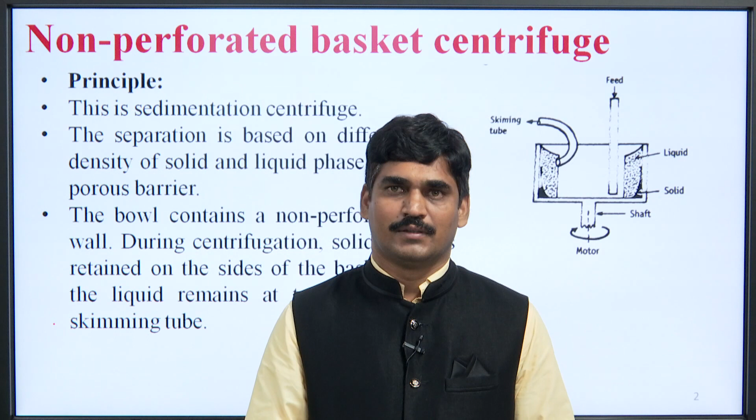The first equipment we are going to discuss in this lecture is the non-perforated basket centrifuge. In previous lectures, we have already discussed the perforated basket centrifuge.

The principle of working of this non-perforated basket centrifuge is that it is a sedimentation centrifuge. The separation is based on difference in density of solid and liquid phase. Heavier particles separate to one side and lighter particles get separated and deposited on the other side without a porous barrier.

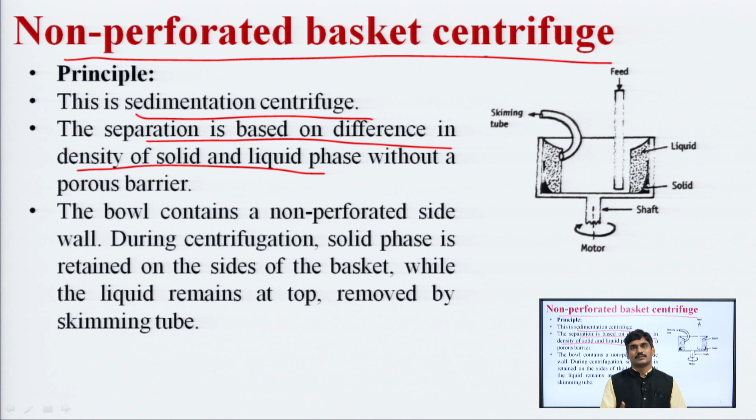As you see in the diagram, these are the two different portions where both the particles are separated out. This is the direction of rotation of this apparatus, which is attached to a motor and shaft. From the top of the apparatus, feed is introduced into it.

The bowl which is used for the separation process contains a non-perforated side wall. As in the previous case, we were using perforated side walls, and beneath those perforated side walls, filter cloth or screen was used. Here, no perforation is there on the side walls.

So what happens during centrifugation: solid phase is retained on the sides of the basket, while liquid remains at the top, and this liquid can be removed with the use of this skimming tube.

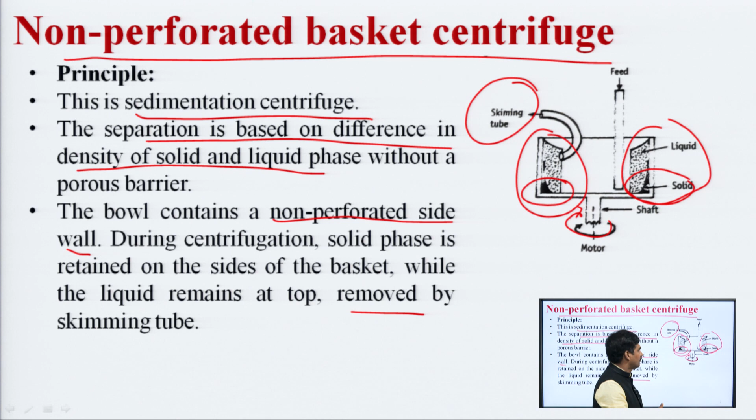With the help of this skimming tube, liquid which is present on the top is removed. The solid particles are at the bottom of the basket and the liquid particles are on the top of the basket. From the top, these liquids are collected with the help of the skimming tube.

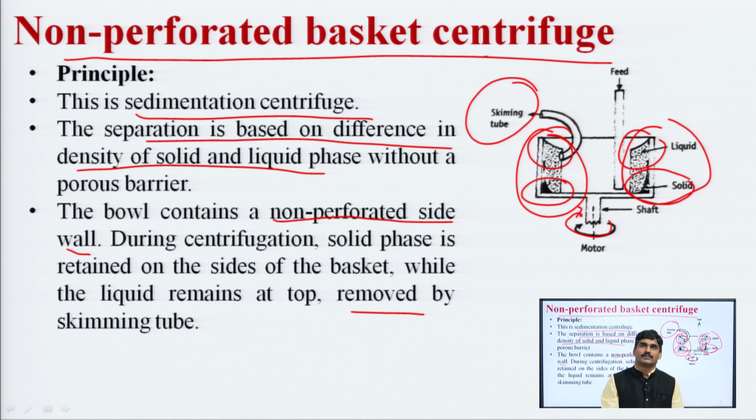Construction of this basket centrifuge: the basket which is used is made up of steel. Second, it is suspended on a vertical shaft. Below this shaft, one motor is attached, and with the help of this motor, the shaft moves.

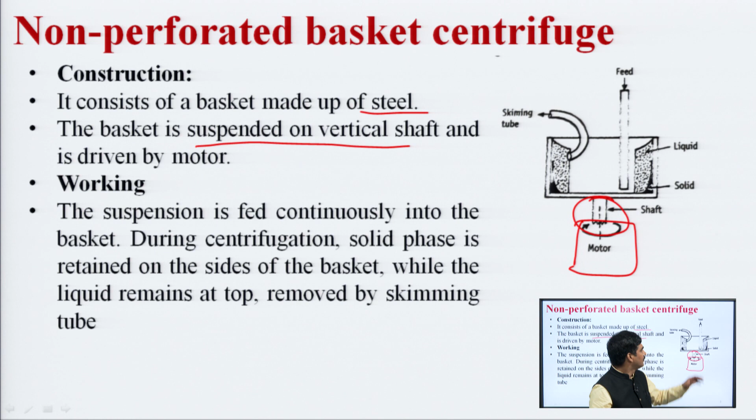Now, working of this non-perforated basket centrifuge: the suspension is fed from the top. This is the point for entry of suspension or slurry into this non-perforated basket centrifuge. From this top position, the suspension or slurry can be introduced into the centrifuge continuously, so we can say this centrifuge can be used as a continuous type centrifuge.

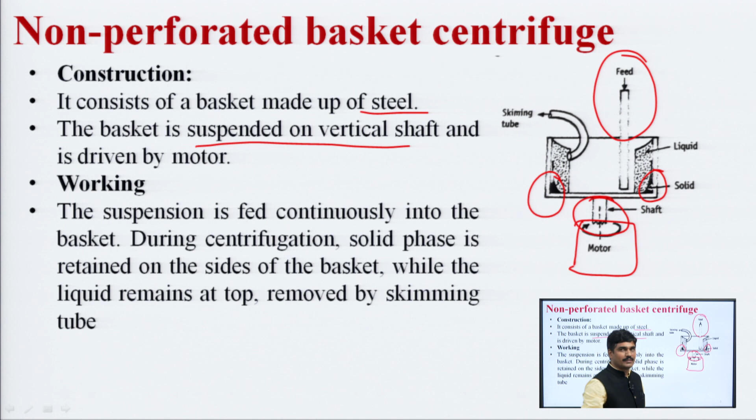During centrifugation, the solid particles are retained on the sides of the basket. Here you see the dark particles, which represent the solid particles. This solid phase remains retained on the sides and bottom of the basket, while the liquid present in the suspension remains on the top portion of the centrifuge.

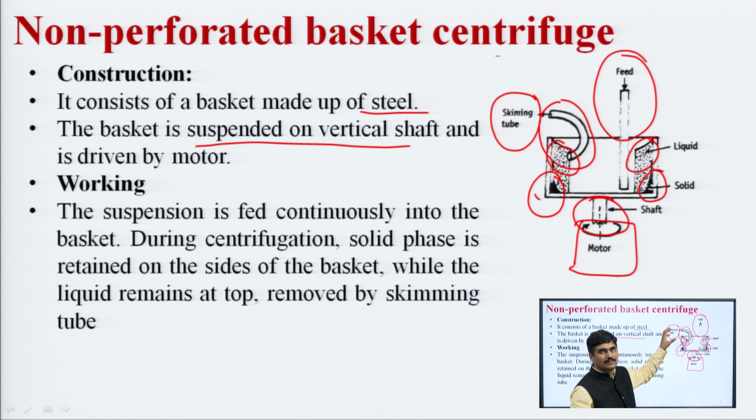As the amount of liquid gets collected on the top of the centrifuge, it is taken out through this special tube, called the skimming tube. With the help of this tube, the liquid which is separated out can be collected on the other side or removed from the centrifuge.

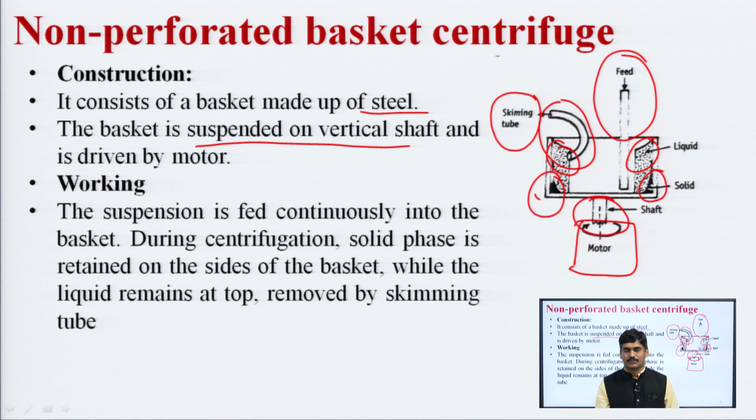Working of this non-perforated basket centrifuge: when the suspension or slurry is introduced into the non-perforated basket centrifuge, it is rotated with the help of the motor and shaft. After rotation, separation of particles takes place.

Solids are separated since solid is denser than liquid particles, so it gets separated on the bottom and side walls of the container, while the liquid is on the top of the centrifuge, and from the top the liquid is collected out with the help of skimming tubes.

So in this way this centrifuge works. As the solids which are collected after centrifugation get deposited on the walls of the basket, if the depth of solid is increased on the walls of the centrifuge, the centrifugation process or operation is stopped, and the solids are scraped out by hand or with the help of a blade. The solids which are deposited can be collected, or the cake can be removed.

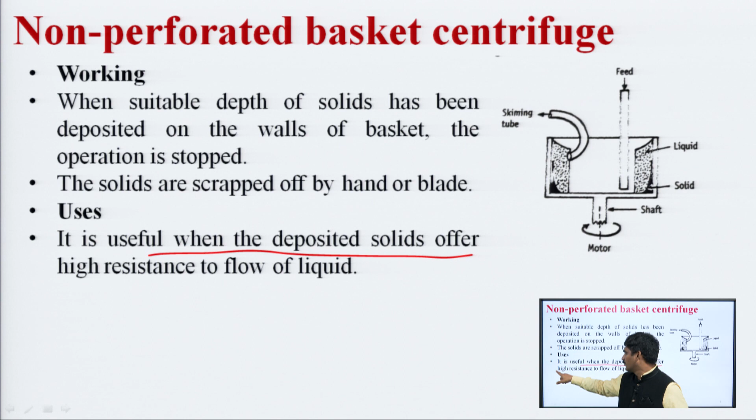Uses of this non-perforated basket centrifuge: mainly it is useful when the deposited solids offer high resistance to the flow of liquid. In such cases, this type of centrifuge, the non-perforated basket centrifuge, can be used for separation of solids from the slurry, and both the solids and liquids can be separated out.

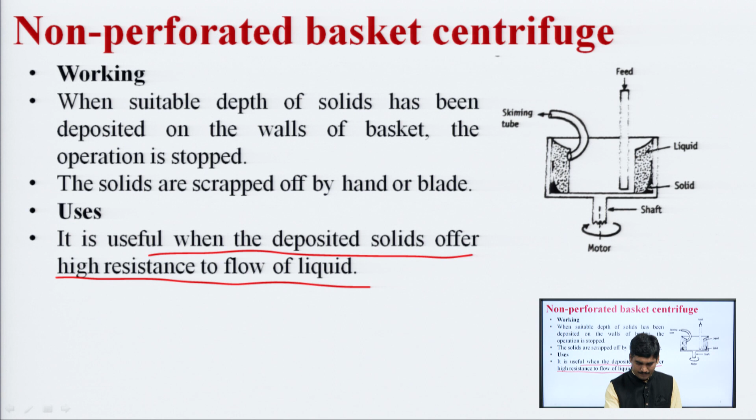So, it consists of a rotating basket placed on a horizontal shaft. In previous cases, we have used a vertical shaft. In this case, we are using a horizontal shaft. So, the rotating basket is placed on a horizontal shaft, and again the sides of the basket are perforated as has been explained earlier. So, there is a perforation on the sides of the basket.

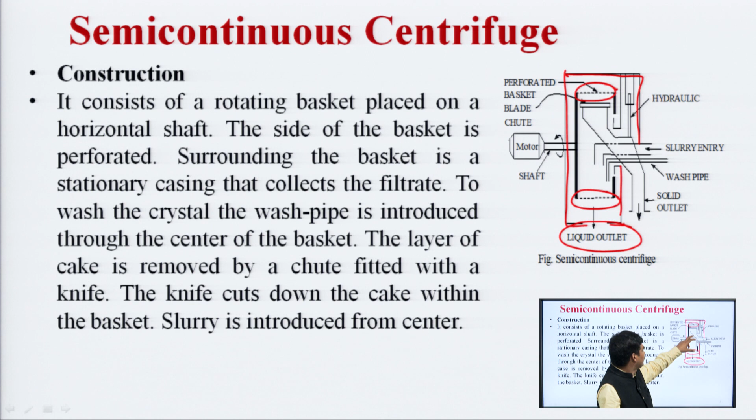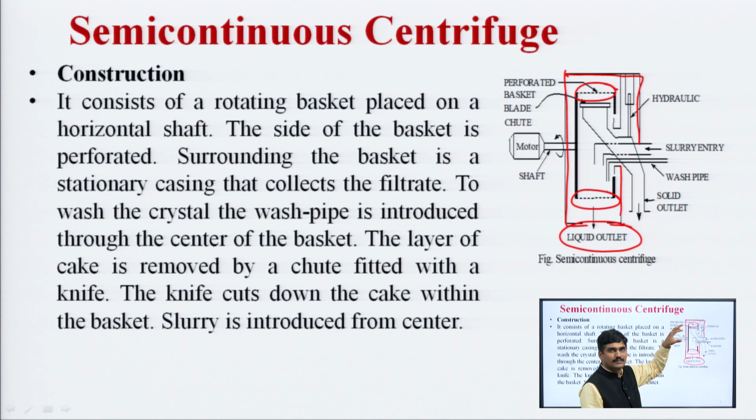To wash the crystal, the wash pipe is introduced into this assembly. The layer of cake is removed. The cake which is deposited on the walls of this perforated screen can be removed with the help of a blade. This blade is called a chute. With the help of this blade, the cake can be removed.

So, the layer of cake is removed by this chute fitted with a knife. The knife cuts down the cake within the basket, and it is removed, and again the slurry is introduced from the center. At this point, slurry is introduced into this pipe, cake is cut from this portion, and through this outlet the solids or cakes are collected. So, this is the simple construction of this semi-continuous centrifuge.

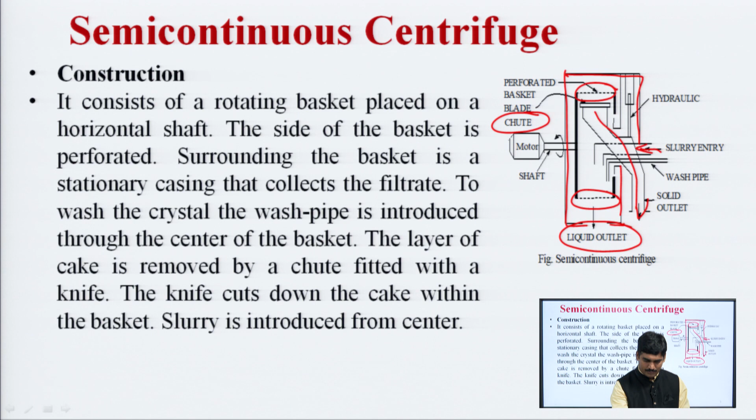If you see the diagram, as already explained, perforated sides are there on the container. This is the motor, this is the horizontal shaft. With the help of this shaft, this assembly rotates. This outer layer is a stationary casing in which the filtrate is collected, and from this liquid outlet the filtrate can be collected into the receiver.

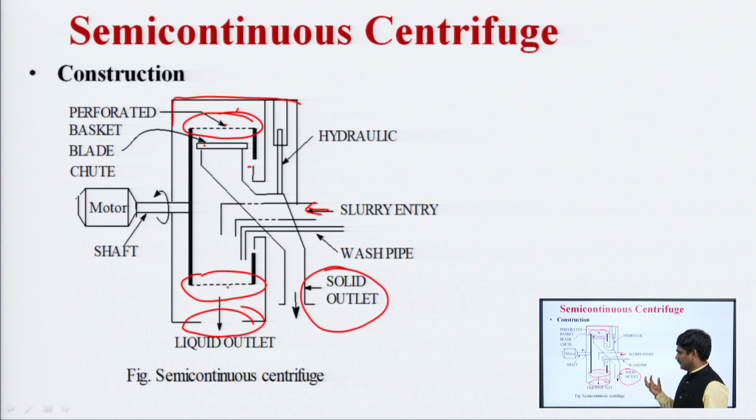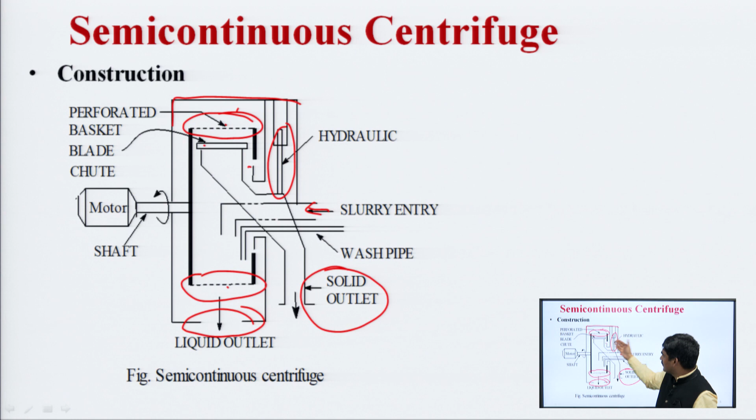There is a point for slurry inlet. Through this, slurry is introduced into this chamber. Here the knife is fitted; this assembly is called the chute. From this assembly, through the solids outlet, solids can be collected. This is a point for hydraulic; with the help of this hydraulic, this assembly can be introduced. This is called the wash assembly. After washing or removal of cake, this is taken out, slurry is introduced into this chamber, centrifugal effect is provided and separation takes place.

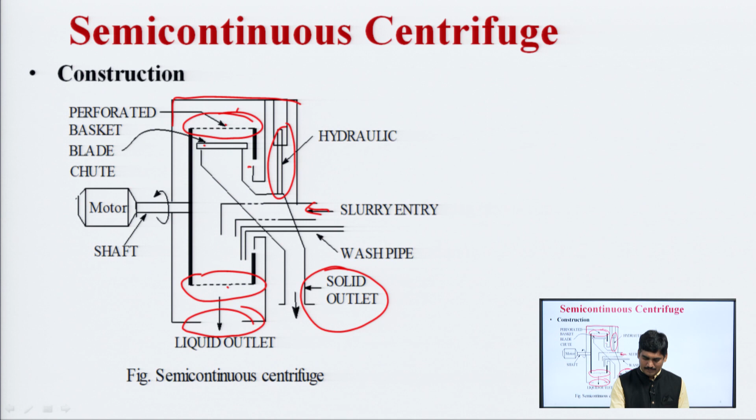Working of this semi-continuous centrifuge. What happens? The basket is rotated horizontally by the motor. The motor, attached with a horizontal shaft to this unit, rotates the basket, and the basket has perforations on the side walls. The slurry enters through this slurry inlet into the basket, and the basket is rotated at a high speed, or the centrifugal effect is applied.

Due to the centrifugal effect, the liquid present in this slurry passes out through the perforations into this stationary unit. From the perforated side the liquid comes out, and the crystals present in this slurry remain on the sides of the perforations.

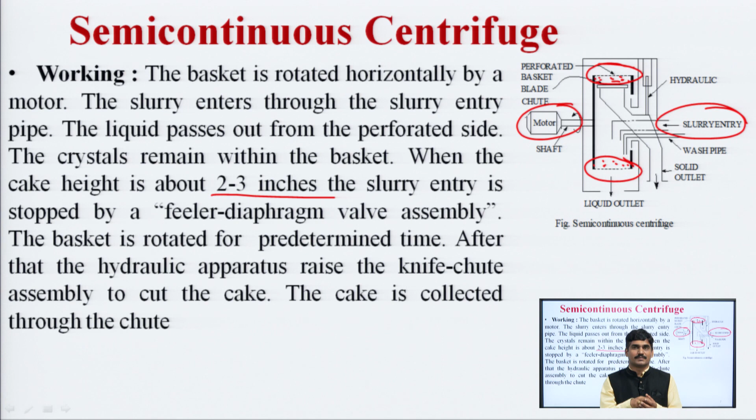As soon as the height of cake reaches 2 to 3 inches, the entry of slurry is stopped by a feeler diaphragm valve assembly. Why is this stopped? The height of the cake remaining within the basket increases, and the limit for that height is 2 to 3 inches. As soon as it reaches this height, the entry of slurry is stopped, and the basket is rotated for a predetermined time.

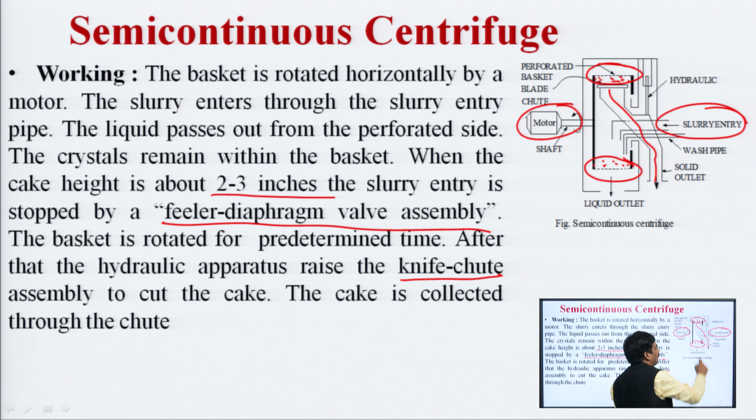After that, hydraulic pressure is applied. Due to this, the blade chute assembly, or knife chute assembly, comes into the basket and scrapes out the cake deposited on the perforated side of the basket, and the cake is collected into this chute assembly and taken out from the solid outlet. In this way the semi-continuous centrifuge works.

So, why is it called a semi-continuous centrifuge? We are entering the slurry into the assembly, and the basket is rotated with a certain speed till the height of cake reaches 2 to 3 inches. As soon as it does, the slurry entry is stopped, and further the apparatus is rotated for a certain period of time.

Then the chute assembly is introduced. With the help of that assembly, filter cake is collected or solid particles are removed, and again the slurry is introduced. So, during this second introduction of slurry, at first we are introducing the slurry, checking the height, stopping the entry of slurry, clearing the solid particles, then again we are entering the slurry into the apparatus.

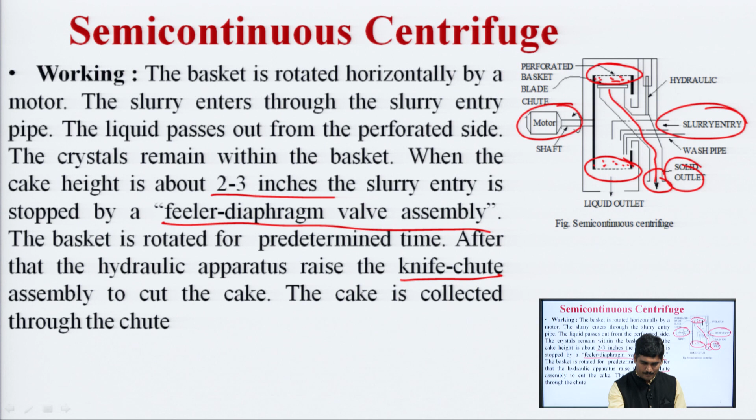That is why there is a gap between the first slurry entry and the second slurry entry. So, due to this reason it is called a semi continuous centrifuge. It means we are not entering the slurry continuously into the equipment for a certain period of time. Now, uses of this semi continuous centrifuge.

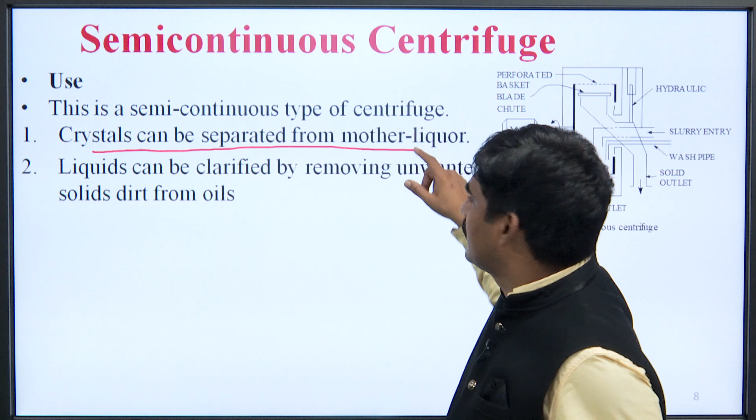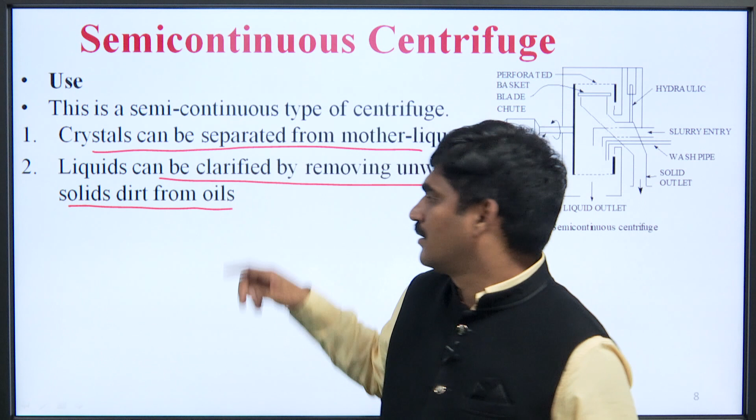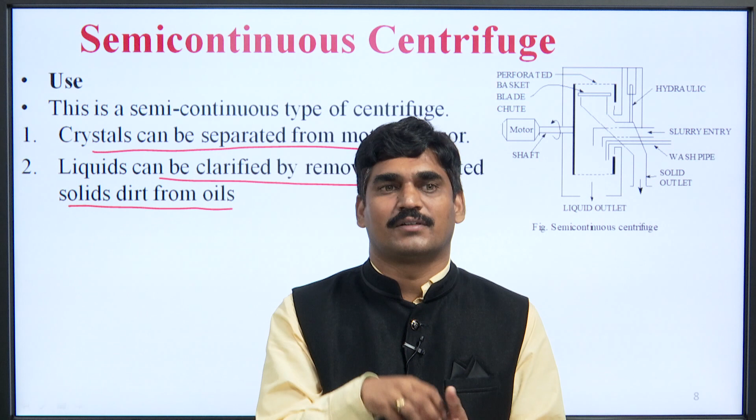In this case, crystals can be separated from the mother liquor. That means this centrifuge is used for separation of crystals from mother liquor. Second application, liquids can be clarified by removing unwanted solids, solid dirt, from oils. That means, for separation of dirt particles or solid particles or unwanted particles from oils, this semi continuous centrifuge can be used.

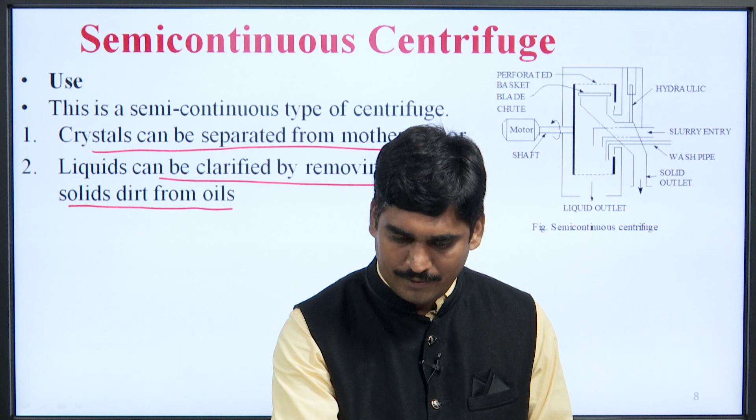Next centrifuge is the super centrifuge. The construction of this super centrifuge is somewhat simpler as compared to other centrifuges. This super centrifuge is an example of a continuous centrifuge. These are used for separating two immiscible liquids. What is the first thing? It is a continuous centrifuge. Second one, it is used for separating two immiscible liquids.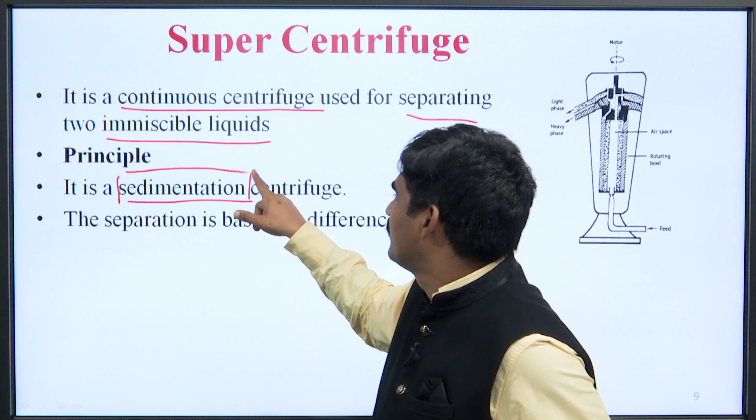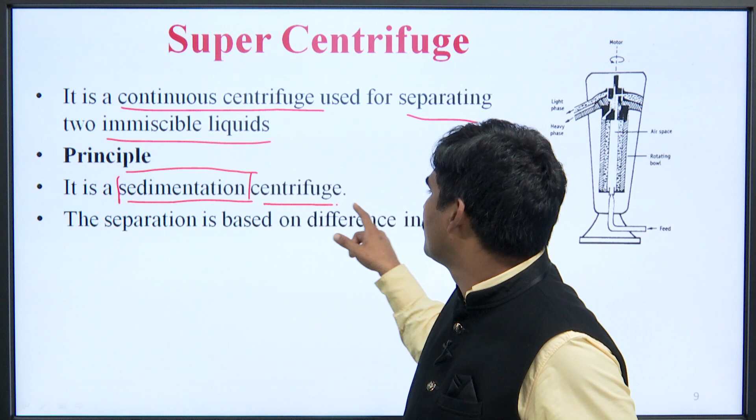The principle behind the use of this super centrifuge is the sedimentation principle. The principle of sedimentation is used for separation of solid and liquid, for separation of two liquids in this type of centrifuge. Second, in this case the separation is based on difference in densities. So, one is sedimentation based, another one is based on difference in densities; separation of particles can take place.

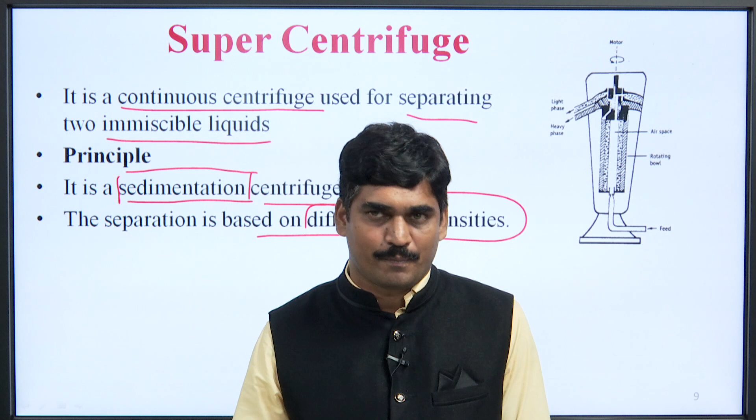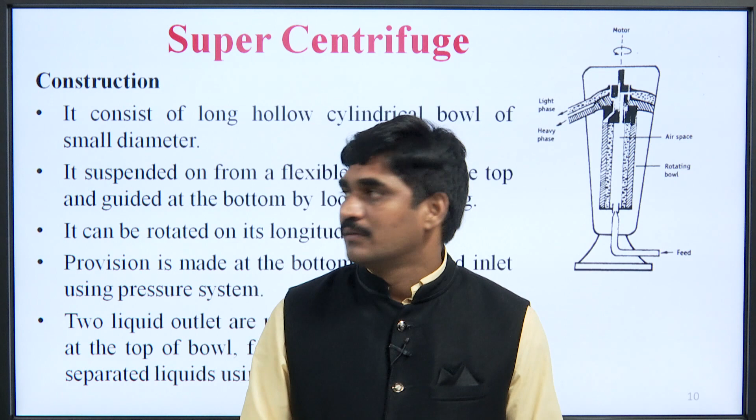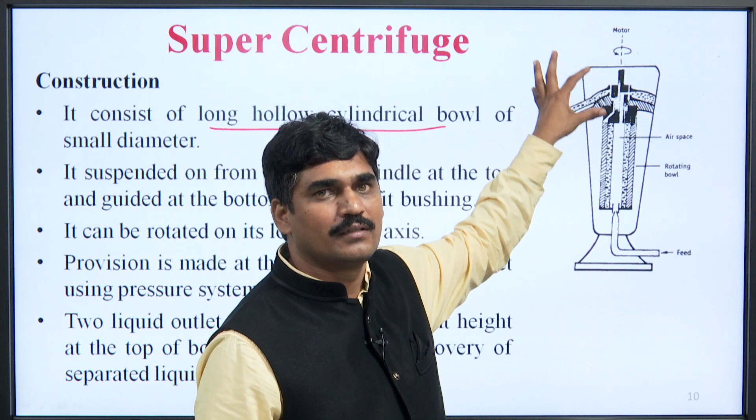Now, construction of super centrifuge. What is the long hollow cylindrical bowl? As you see in the diagram, it consists of a long hollow cylindrical bowl, of which the diameter of the bowl is small. It is suspended from a flexible spindle.

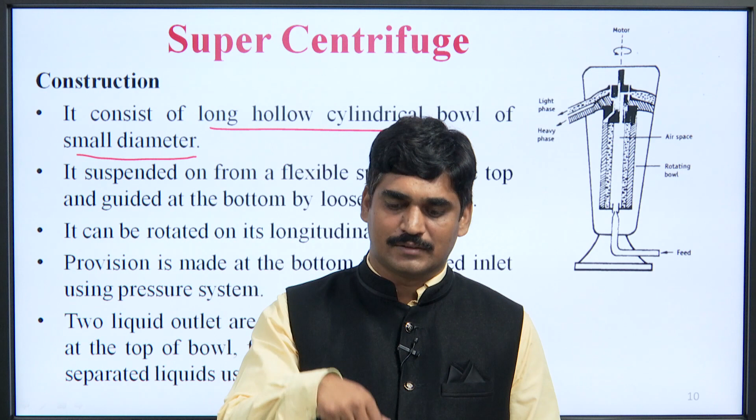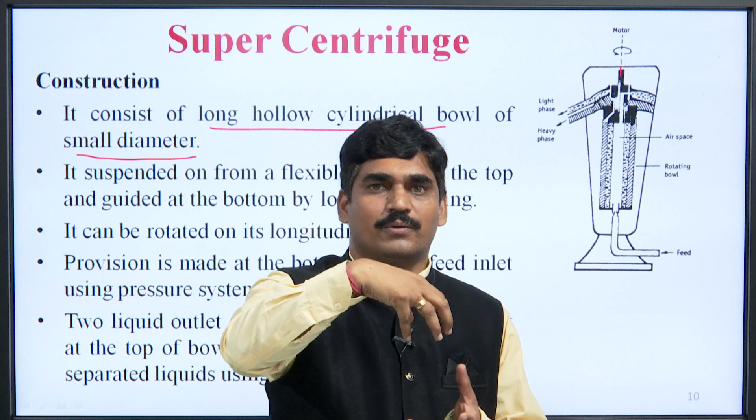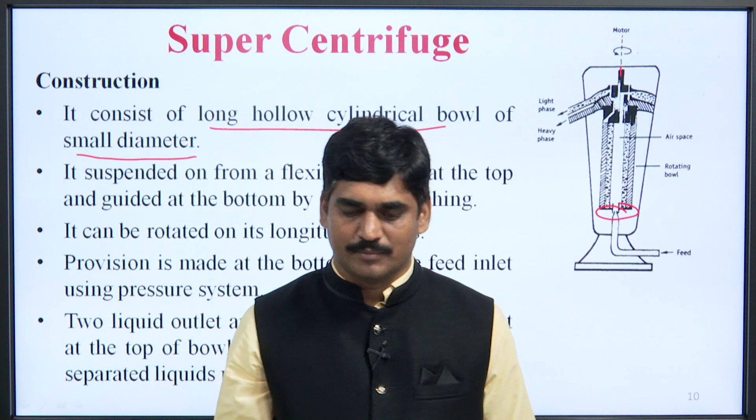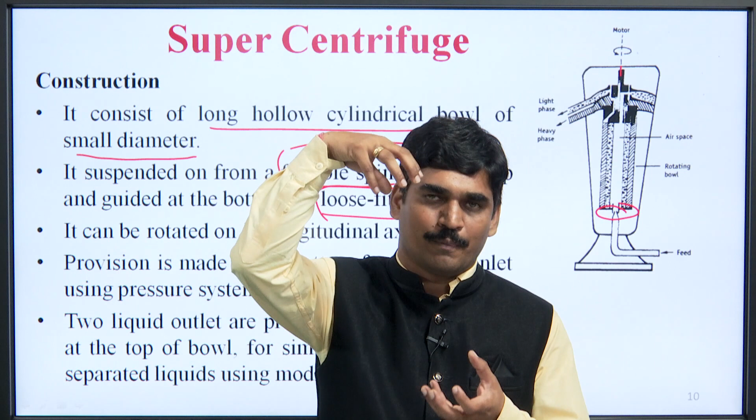So, this is the flexible spindle which suspends this bowl into this centrifuge, and from the bottom also it is guided by a loose fit bushing. What is it? A loose fit bushing and second, a flexible spindle. So, these are the two things by which this bowl is suspended, attached and hanged in the center of the centrifuge. This centrifuge is rotated on its longitudinal axis.

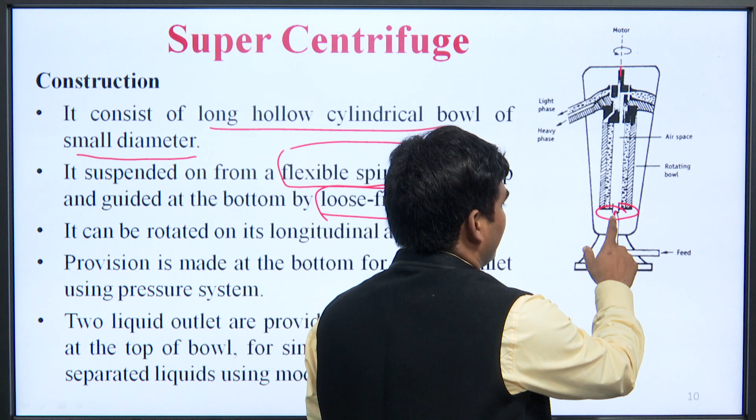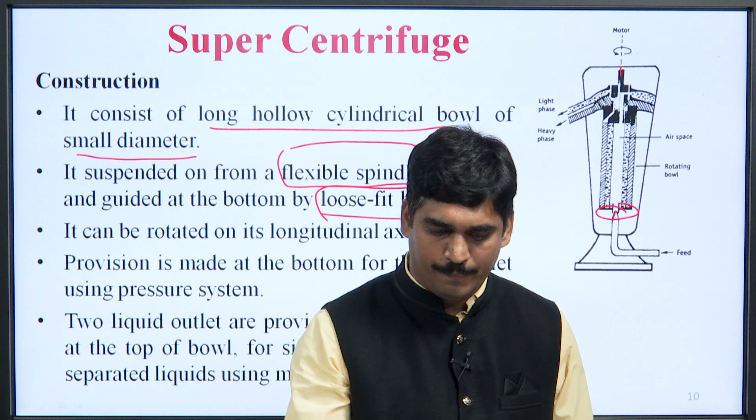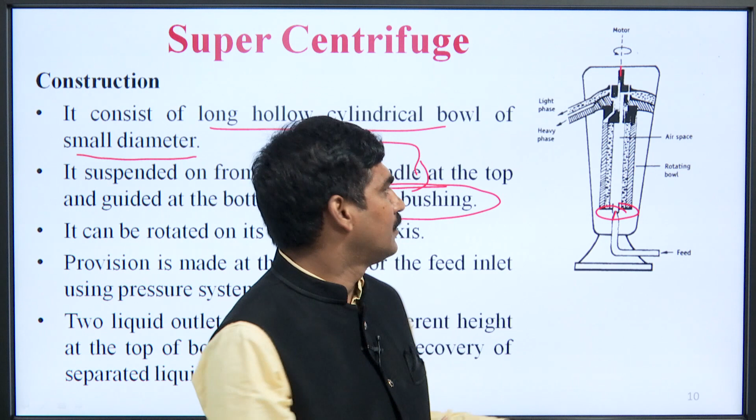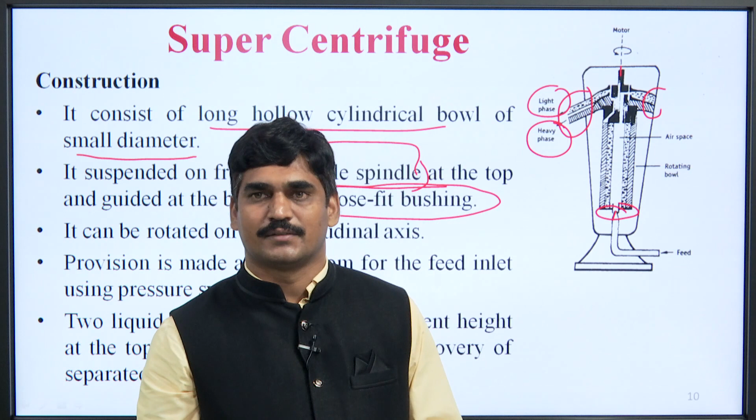If you see the diagram here at the bottom, there is a provision for entry of feed by using some pressure system. As soon as feed is entered from the bottom, on the top, you see two outlets are provided for two different liquids. One is light phase and another one is heavy phase. After centrifugation, recovery of separated liquids can be done by using these modified weirs, from these outlets, as you see in the diagram.

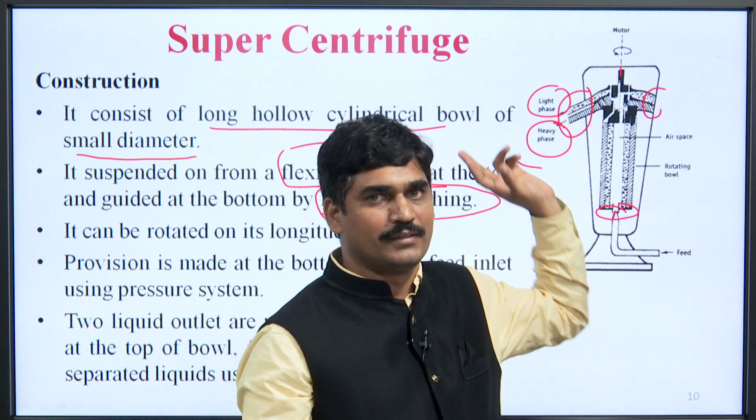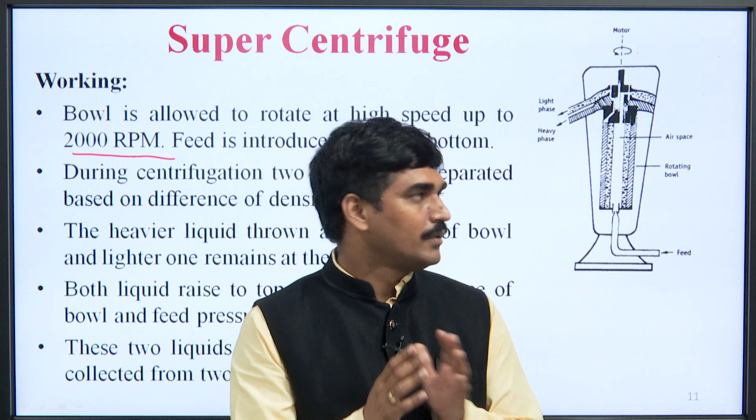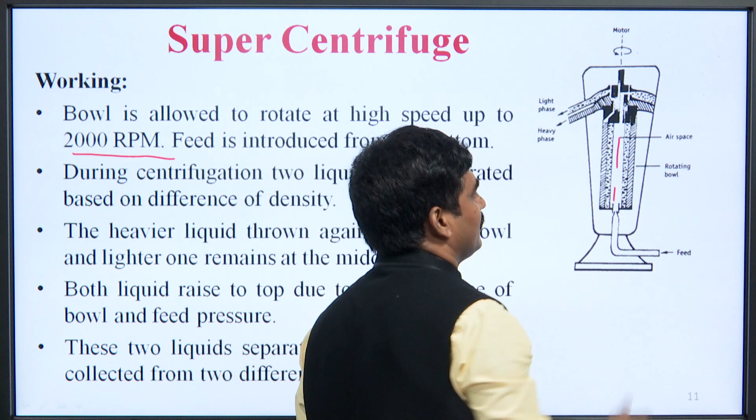Working: the bowl is rotated at a speed of around 2000 rpm. Feed is introduced from the bottom. During centrifugation, two liquids are separated out. So, this is the rotating bowl. From this bottom, liquid feed is entered into it. This is air space as shown in the diagram, and the bowl is rotated at a speed of 2000 rpm.

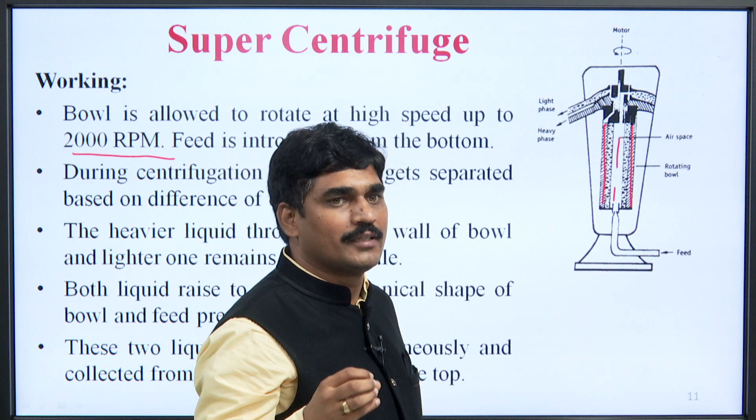During centrifugation, based on the difference in density, both the liquids get separated. How? Heavier liquids are thrown towards the wall of the bowl, and lighter liquids remain at the middle. As you see in the diagram, this portion, these are the heavier liquids, that means liquids having high densities, they are thrown towards the wall of the bowl. On the center side, lighter liquids are present.

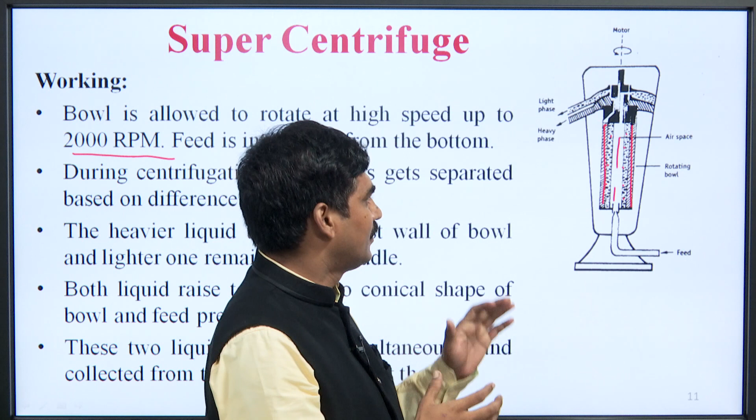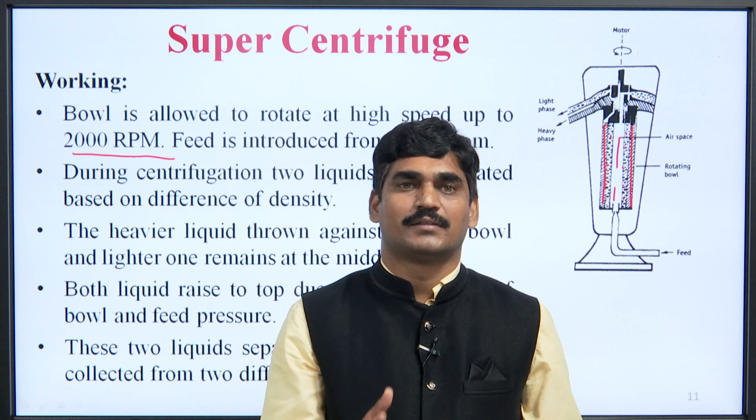So, as centrifugation progresses, both these liquids get separated and move in upward direction, raised to the top. Why is it moving in upward direction? Due to the conical shape of the bowl, and from the bottom feed pressure is also there. So, due to this feed pressure and conical shape of the bowl, the liquid rises towards the top of the bowl.

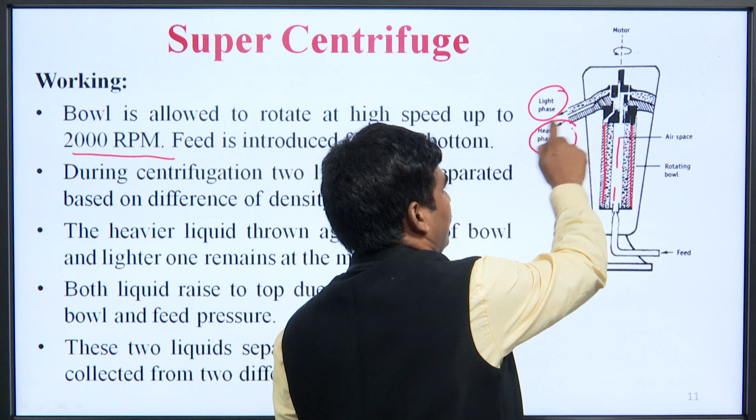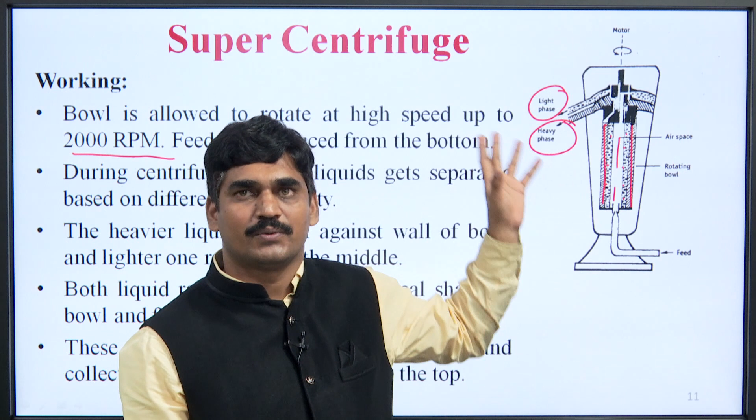From the top of the bowl, these two liquids are separated out simultaneously and collected from these liquid outlets. On the top, the light phase liquid is collected. There is a provision for outlet of light phase liquid, and at the bottom is a provision for collection of heavy phase liquid. So, from these two outlets, the liquids are collected at the top of the centrifuge.

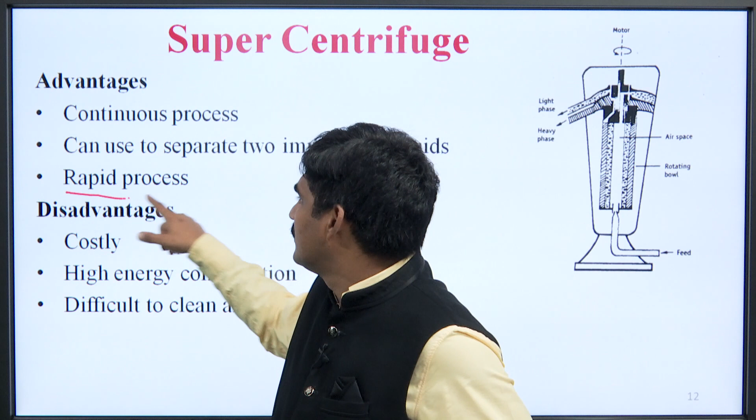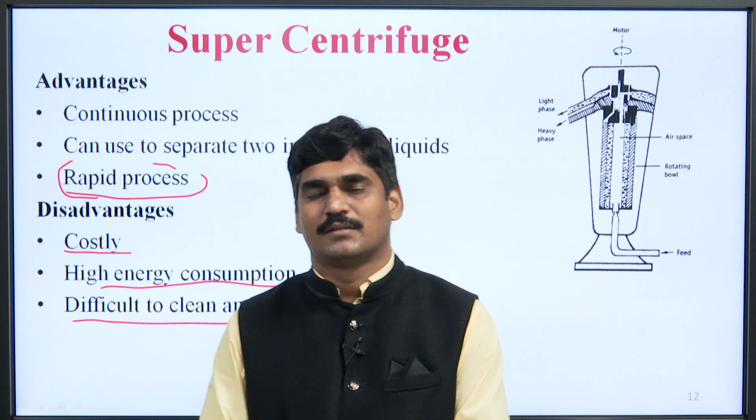Advantages of super centrifuge: it is a continuous process, as explained in the earlier slide. It can be used to separate two immiscible liquids, and the process is also rapid. So, these are some advantages associated with this super centrifuge. Disadvantages: it is costly equipment, high energy consumption takes place during the operation, and it is difficult to clean and maintain the super centrifuge apparatus.